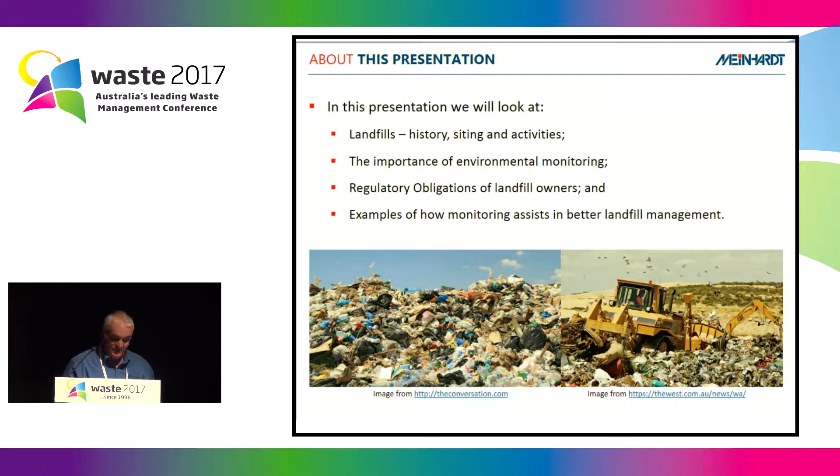Landfills have historically been the most common method of organised waste disposal, typically situated in low-lying areas such as wetlands or old quarries. They represent the oldest form of waste management, dating back to Stone Age middens and early human settlements. Often the most cost-efficient method, especially when backfilling an existing hole, and sometimes used as a method for land reclamation.

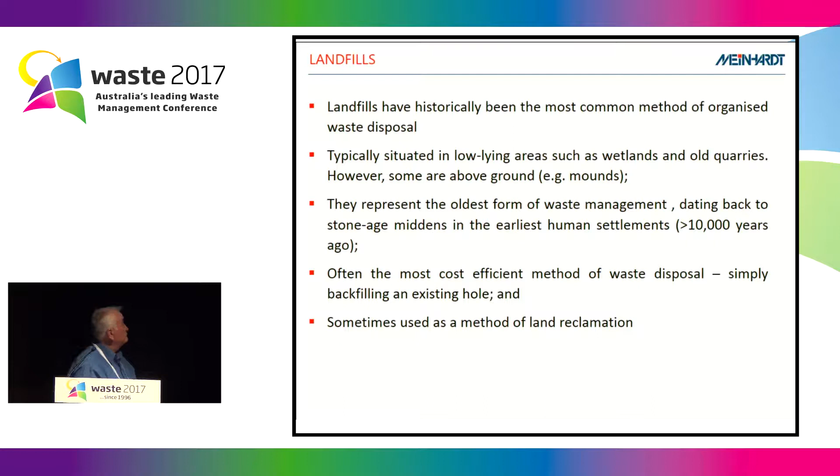The common types of landfills are things like municipal landfills, which generally accept waste generated by the community. Less common are repositories for hazardous and industrial wastes. Some of the older landfills probably also contain hazardous materials because in the olden days they were very poorly monitored, so not much control was given to what was actually being put in the landfill. So a lot of the older landfills can almost be regarded as hazardous landfills as well.

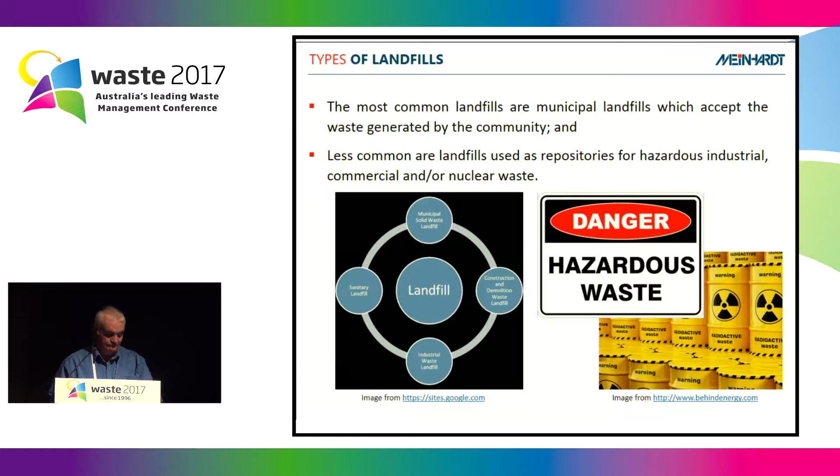One of the main aims of the waste management hierarchy is to try and reduce the amount of waste going to landfill. Many of the talks you'll be hearing at the conference over the next couple of days will be concentrating on the first four points on that diagram.

The policy by governments has also been set to try and reduce the amount going to landfill via use of levies, and to try and help reuse and recycle of material before it gets to landfill. Although resource recovery now is about 60% through reuse and recycling, the amount produced per person has been steadily increasing, and the resulting amount going to landfill remains significant at about 20 million tonnes per year.

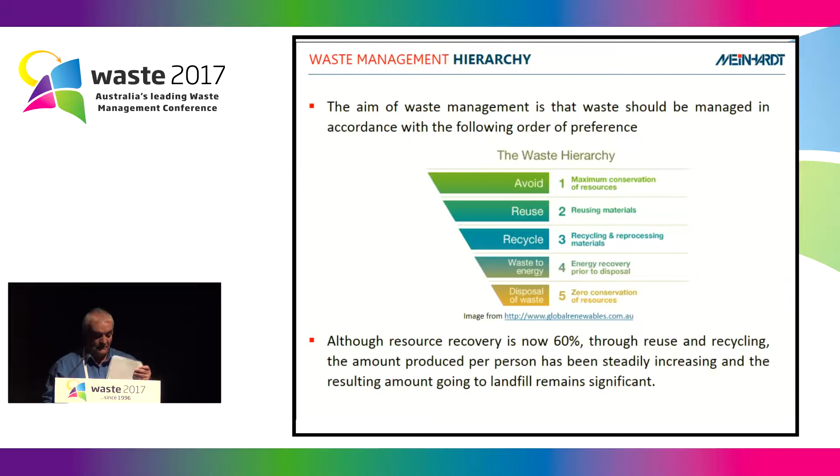The Australian Bureau of Statistics shows that about 19 million tonnes of waste was sent to landfill in 2011, equating to about 880 kilos per person. Recent data corroborates this, in that approximately 20 million tonnes is going to landfill, equating to 830 kilograms per person. So even though we're getting better at recycling and recovery, because we're having a bigger population, there's still significant amounts of waste going to landfill.

72% of the volume is concentrated in New South Wales, Queensland and Victoria. The total number of active landfills in Australia is probably more than 600, but it could be up to 1,000 if including smaller landfills that are unlicensed or not being covered by licences.

There are about 116 current landfills in Australia accepting more than 20,000 tonnes per year. This represents 95% of the total mass being sent to landfills, and some of the advantages of this is that it makes it a lot easier for people to recycle and recover, and you've got less sites where you have a potential for contamination to occur.

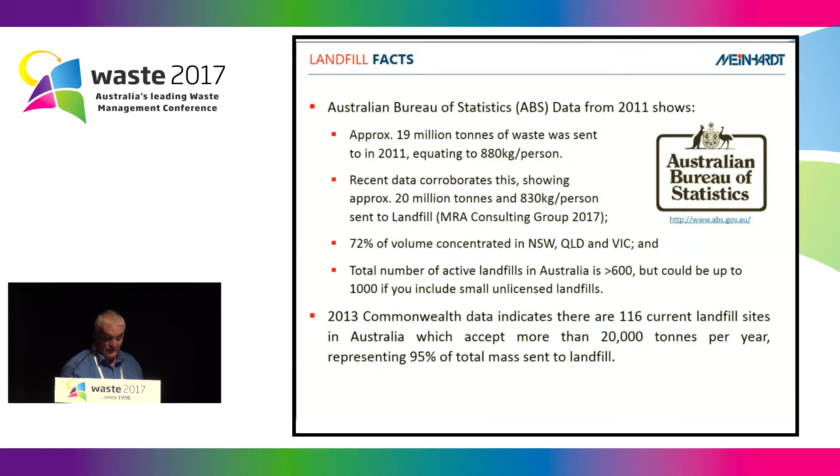One of the main components going to landfill is putrescible waste, a solid waste containing organic matter. Once it hits the landfill, the organic matter starts degrading, and when you're doing landfill monitoring, you're targeting some of the products of this degradation.

You're trying to target things like methane, ammonia, and nitrate. Also things like fatty acids and odours, which are caused by things like butyric acid and propionic acid, and also alkalinity, which are all markers for landfill contamination.

Okay, just look at some of the processes that occur when the main stuff going in is made up of proteins, carbohydrates and fats. That's always broken down to these components, and as amino acids are broken down to acetic acid, you get ammonia coming off here, so that's one of the products.

Some of these intermediates are propionic acid and butyric acid. These are sort of what gives a lot of the odours you get coming off landfills. And at the bottom here the final product is methane, and there's also CO2 produced as well, and once the CO2 dissolves in water you get alkalinity occurring, so you're looking for that as well.

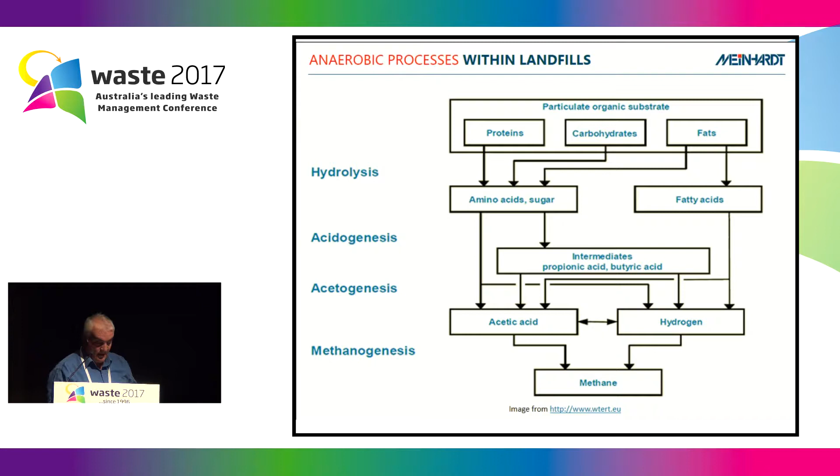So as a definition of environmental monitoring, it's a systematic sampling of air, water, soil and biota in order to observe and study the environment. The monitoring can be conducted for a number of purposes, including establishing an environmental baseline of trends to see whether landfills actually have an impact on the environment. You want to be testing environmental modelling processes, maybe.

It can also be used for education of the public about environmental conditions, so whether you are actually having an impact or not. It can inform policy design and decision making, whether you're going to do more or less monitoring, whether you need more monitoring points around your landfill. It can ensure compliance with environmental regulations, and it's an assessment of the effects of anthropogenic influences. So you want to compare what you're getting around the landfill to a baseline.

Environmental monitoring programs can vary significantly in scale, in the scale of their spatial and temporal boundaries. An example of that would be atmospheric monitoring of CO2, which gives you greenhouse gas monitoring.

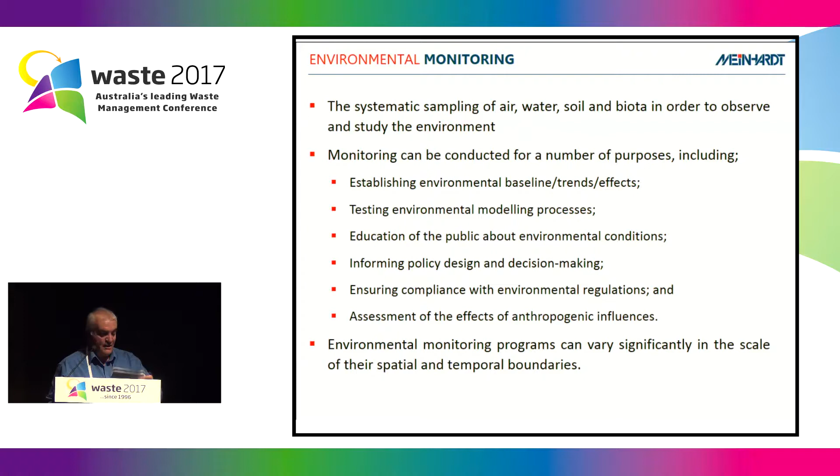All right, some of the challenges in monitoring around landfills is actually trying to separate the impacts of the landfill from the impacts associated with other local or regional influences. A lot of the problems also occur because there's usually a lack of baseline background data. There's usually no data from before the landfill commenced.

There's also inadequate monitoring, and there might be an inadequate number of actual monitoring points. There could also be poor monitoring or monitoring point construction or location, and sometimes there's missing data.

So things have actually been constructed around the landfill, but there's no data telling you how it was constructed or what you're actually measuring, so you don't know where the samples are coming from at all. An example for that is groundwater bores - if you don't know where the bores are screened, you don't know where the groundwater is coming from.

The challenge is to identify the impacts arising from the landfill versus the impacts arising from things happening around the landfill. The key to this is always trying to find appropriate background monitoring points.

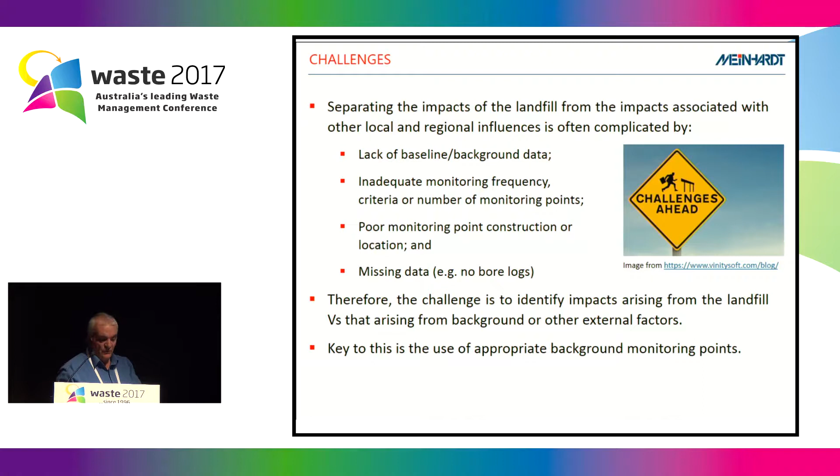So if you've got groundwater bores, you need to place them upgradient into the landfill so you can measure a background value, and also measure downgradient into the landfill to try and see whether the landfill has actually affected the groundwater. So this is a little bit more about that sort of stuff.

So in this case here, you've got some landfill gas bores on this side. So even though the landfill gas is being extracted from this landfill, there's still a possibility that some gas is escaping, and these bores are placed right around the landfill. The density of those would depend on what sort of geology you have around the landfill - if you're in a sandy geology, you'd probably put more of these around the landfill, and in a very heavy clay, you'd put less. These things would also have slotted screens all the way down to the base of the landfill, so that any gas coming across comes up and can be detected here.

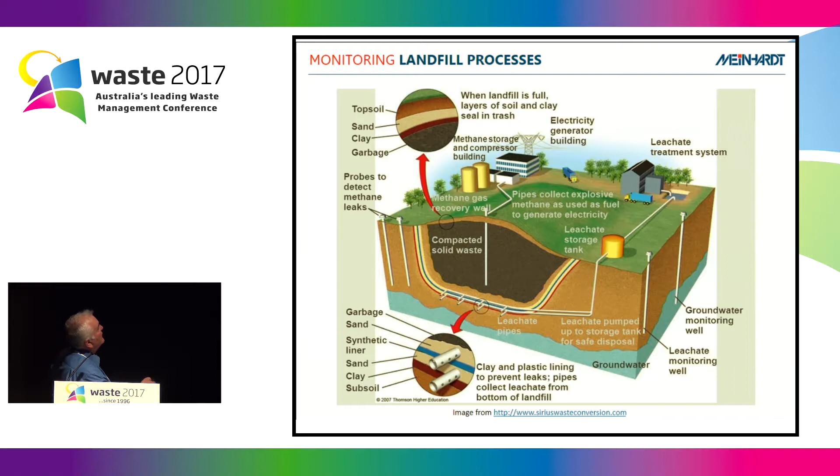The other main monitoring things you would use would be the groundwater wells. Those ones there would extend down into the groundwater below the landfill, and you'd place some up gradient to the groundwater flow. So if the groundwater is flowing across this way, you would place upgradient ones up here, and then downgradient wells on this side, and you'd be looking at changes in the chemistry between this monitoring well and that one on that side.

And then the leachate wells, you'd be looking for any seepage, even though you've got a lining on the landfill here. There's still a possibility that the lining is broken, and there's still a possibility that leachate might escape from that. So you need to have leachate monitoring wells here as well.

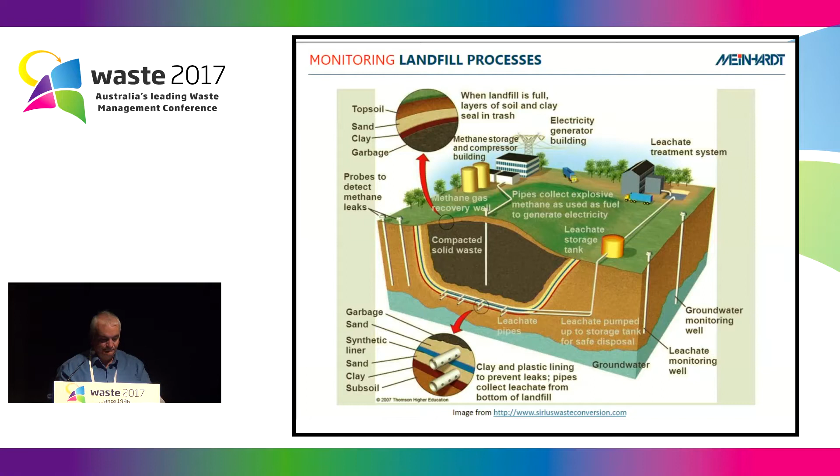Let's talk a little bit about the regulations here in New South Wales and Victoria, and how they pertain to monitoring. These are the New South Wales guidelines. They're set up in two parts. They have general information at the beginning, and in Part B they've got a whole range of minimum standards.

But what they also do is talk a lot about water quality monitoring and how to manage and monitor landfill gas.

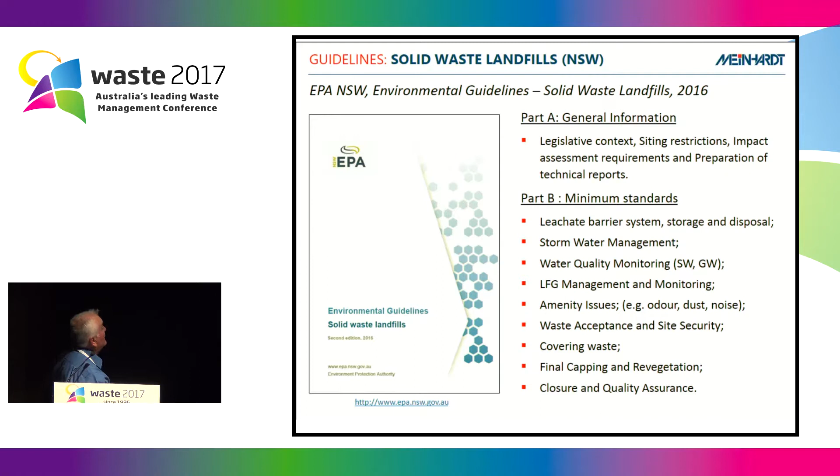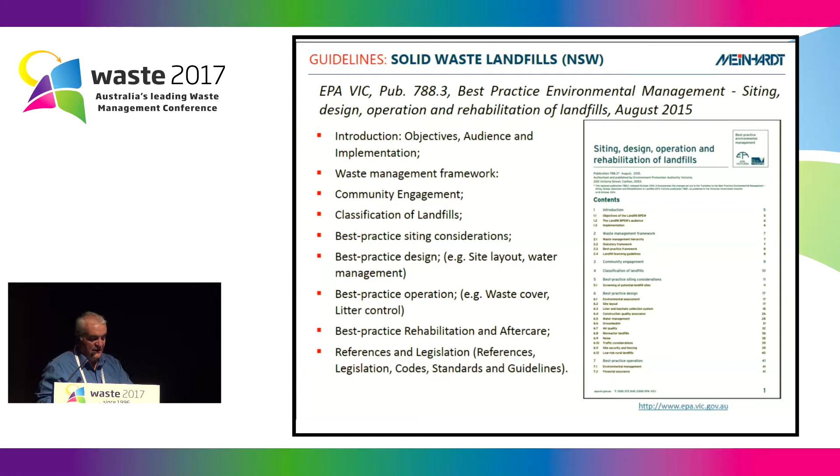And we have the BPEM in Victoria, which is similar. They've got a general section at the beginning, and then a more detailed section following where they talk about things like landfill gas generation and design of landfill gas monitoring bore systems.

All right, I'll just quickly move on to a few case examples we've got.

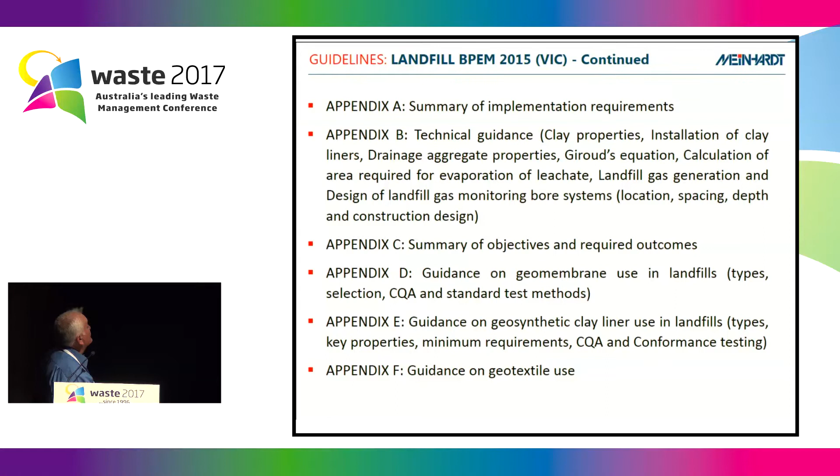This is some work we've done for NetWaste regional councils. It's a voluntary waste group formed in 1995. There are 25, or 26 councils I heard today, that's actually more. In 2012, we were awarded a contract to conduct the sampling for these guys.

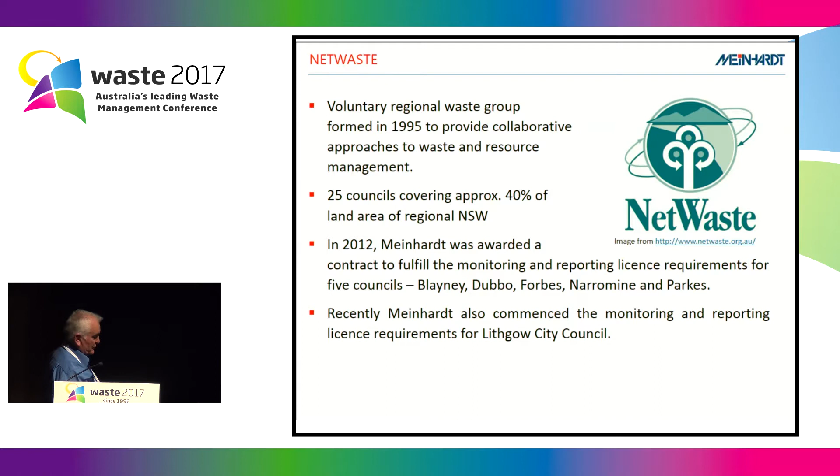Some of the 5 councils were Blayney, Dubbo, Forbes, Narromine, and Parkes. And recently we also started doing some work for Lithgow City Council as well.

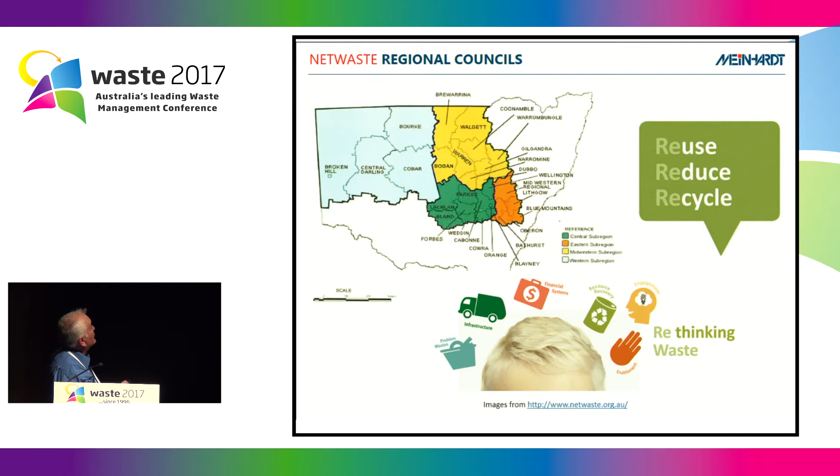Looking at these councils, they had a number of groundwater, surface water and landfill gas sampling points. They had 4 to 6 groundwater points. Surface water is a lot less, except Dubbo's got quite a few ponds on site, so they've got more points to measure.

Dubbo is the only site that actually had to do landfill gas monitoring. The other sites just had on-site buildings that had to be monitored. There were 4 subsurface sites that had to be done, and Parkes was the only one that had to have any dust samples taken.

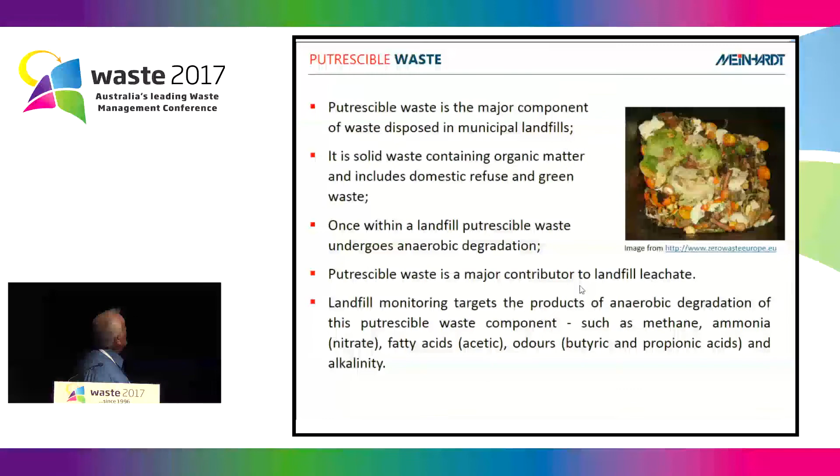I'll just skip that actually. What we did for these guys was, through some of the results we got through our monitoring, we were able to reduce the amount of sampling they had to do.

We looked at the groundwater depth and receptors away from the landfill, and we negotiated with the EPA to get the reduction of sampling for Parkes down from monthly groundwater to biannual, but we were unable to alter any dust sampling frequency because the dust results were always variable and above the guidelines.

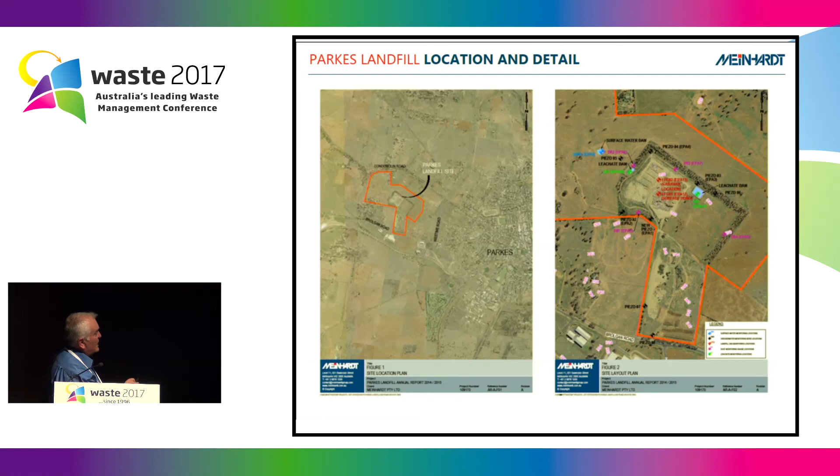We were arguing that looking at the site, the dust could easily be coming off-site compared to even on-site. If you look at the area around the landfill, it's all farmland, and it could easily be producing a lot of dust itself, but we couldn't really prove it was coming from off-site, so the EPA wouldn't accept that argument.

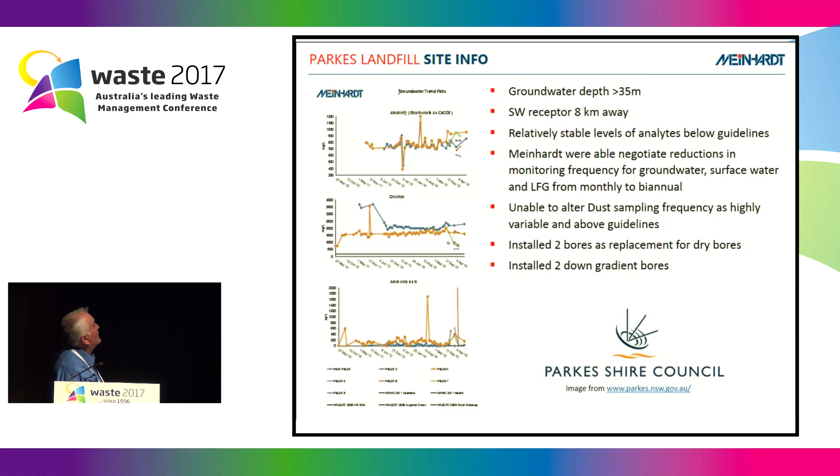Just to finish up. Oh, no, not that one.

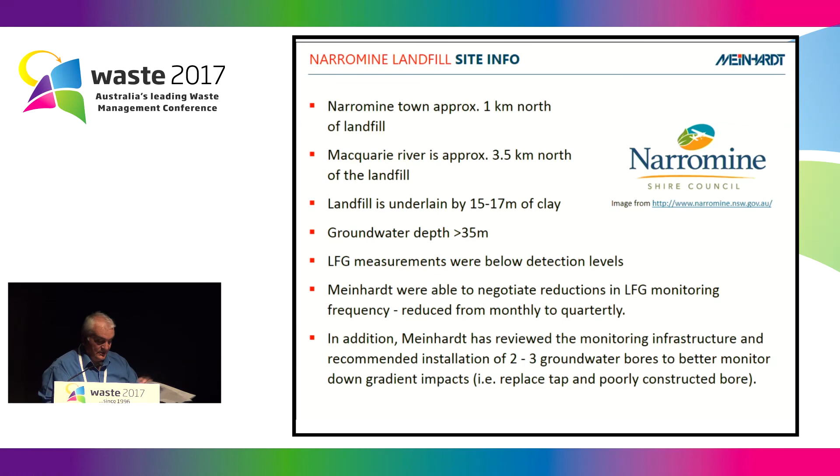The reason landfill monitoring is important is to build up a database of baseline, operational and post-closure data, which can be used to assess compliance with licence requirements and guidelines. It can also be used to assess whether monitoring frequency, location, or number of monitoring points are adequate, whether the landfill is adversely impacting the surrounding environment, whether impacts are from the landfill or other local and regional influences, and whether we need any further action, ultimately to ensure the safety and amenity of the environment. Thank you.